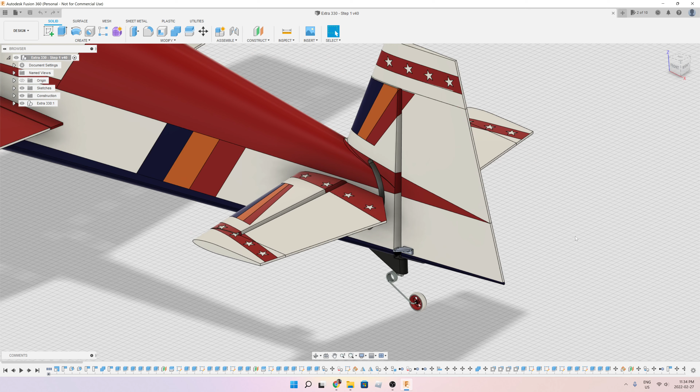I basically finished the wings, the elevator, and the rudder. Let's look at the rudder. So if you look here at the hinge, let me expand this and show you what I've done here.

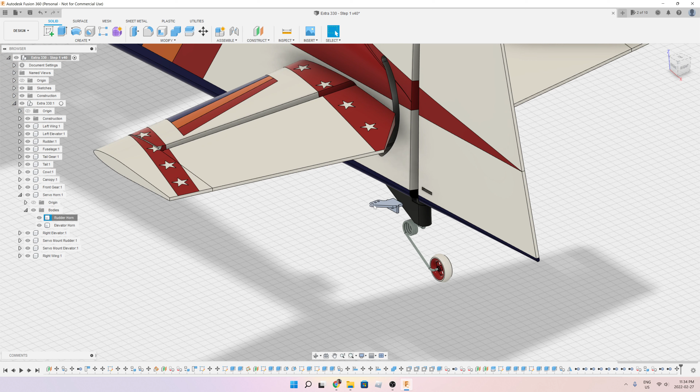I've created holes in the rudder, or a hole in the rudder, so that you can print this hinge separately, then slot it in. And I've tried actually printing this first part of the rudder, and this hole is fully printable and works perfectly this way.

Furthermore, I've split the rudder into two parts to make it easy for you to 3D print it. And let me show you what I mean.

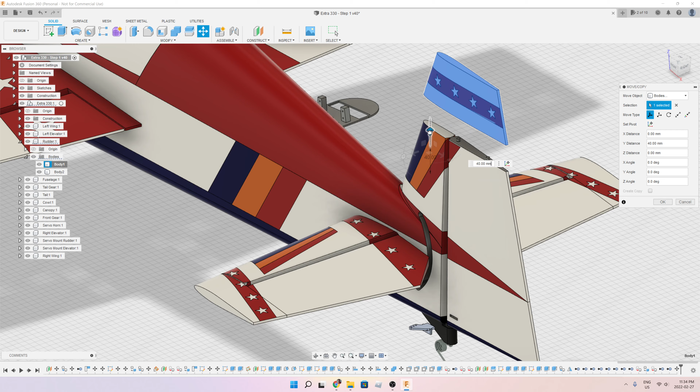I'm gonna expand this. I've split it into two parts. I'll take the first part, I'll move it up, and you can see that I've cut it into two pieces, and I've created alignment tabs. And those tabs will go into alignment holes on the second part, which would make it really easy to print it and glue it together, align it and glue it together.

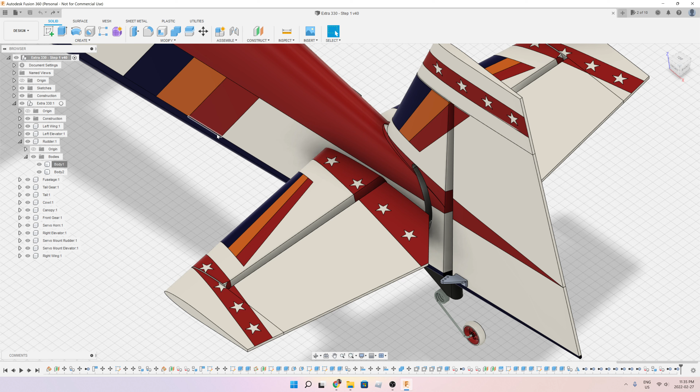The other thing I've done is I've designed small slots for TPU hinges, and those hinges are perfectly 3D printable if you have a TPU filament, which I have. I've actually designed a TPU hinge that I can insert here and glue with CA.

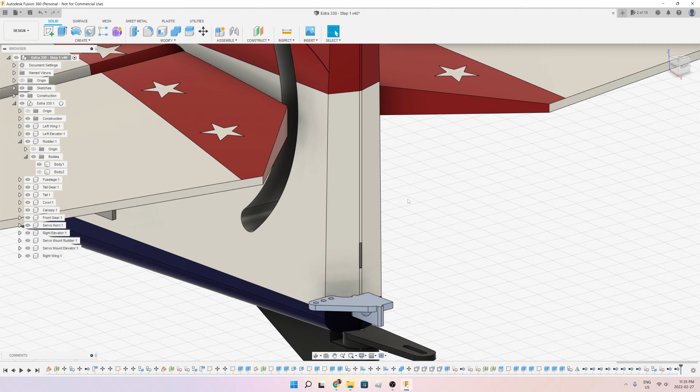So you can see one slot here. This is the second slot, and this is the third slot. And again, I've tried this. I kind of printed like a mock rudder, and I've inserted the TPU hinge in it. I've put some CA glue, and it works perfectly.

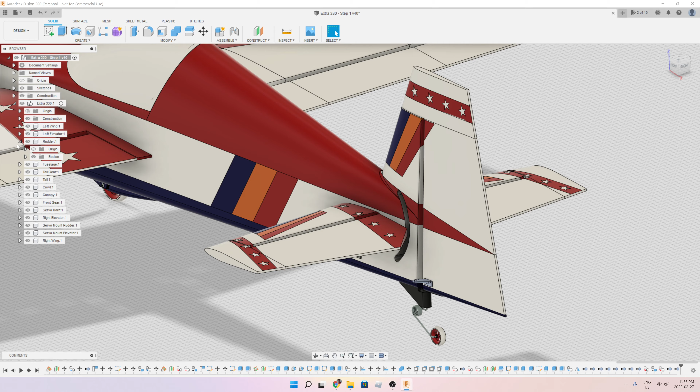Okay, now let's go to the elevator. Same thing for the elevator. I've made a hole for the horn, for the servo horn.

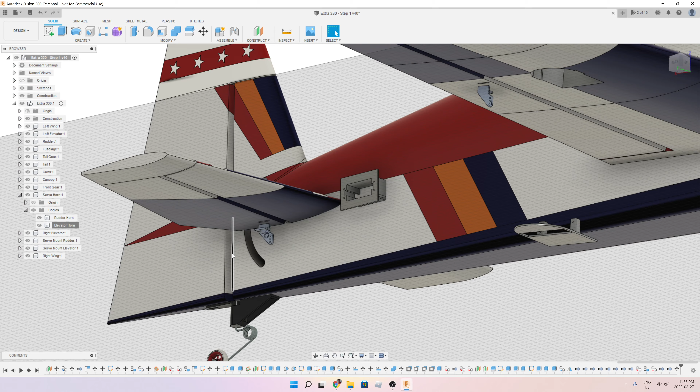Let me take it down and show you. You can see the hole here. Again, fully 3D printable. It's 3D printer friendly.

And I've created this arc here, this hole, which traces an arc in the fuselage, because I'm gonna basically control the elevator using one servo, which is gonna be mounted here. And then I'm gonna connect both elevators with a spar.

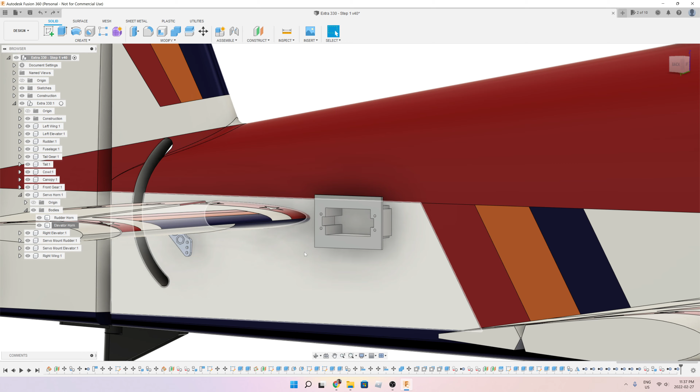And if you look here, you'll see the servo mount. So you just plug in the servo here, and you will have a hole in the fuselage that this servo mount will go into and gets glued, and then this servo would connect via the push rod to the servo arm and will control basically both elevators.

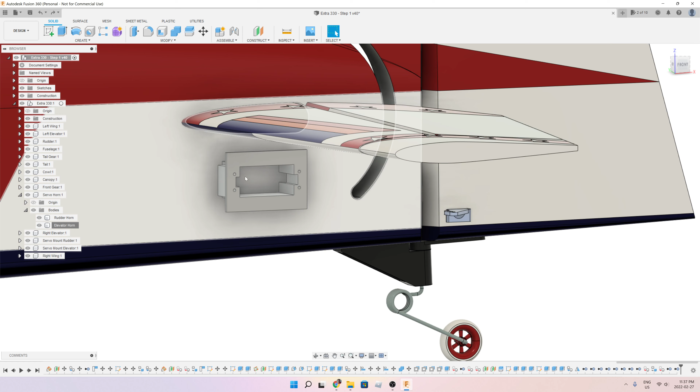Same thing for the rudder. I have basically put a servo mount here, and then you would basically mount the servo. There's a hole in the fuselage here. You're gonna basically push it in, glue it, and then connect the rudder servo with the push rod to this horn.

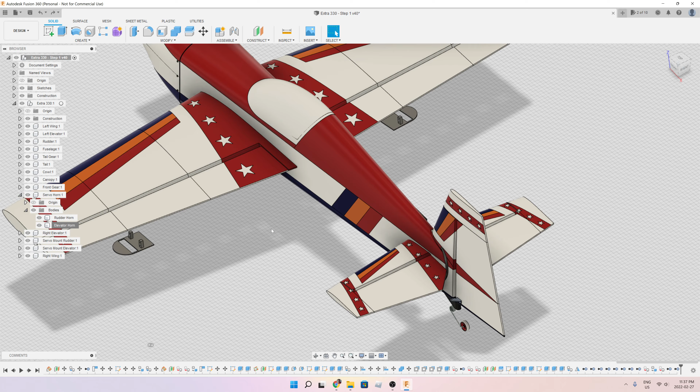I've done the same thing also to the elevator. I've basically cut it into two parts for ease of printing, and same thing here. Let me pull this apart. I've created alignment tabs so that you can basically align it easily when you want to glue it. So you print the elevator in two parts, you put glue here, you align it, and that's it. Really easy.

And same story for the elevator. I've created the slots for the TPU or nylon hinges, 3 of them.

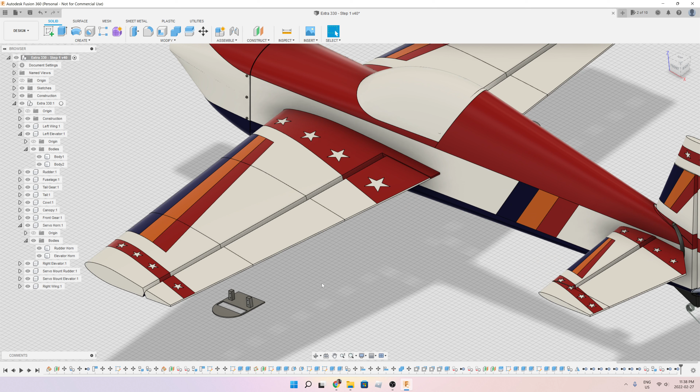Let's go now to the wing, the main wing. As you can see, the wing is quite long, so I've split it into 3 main parts. Even the aileron is split into 3 main parts, same concept as the elevator and the rudder.

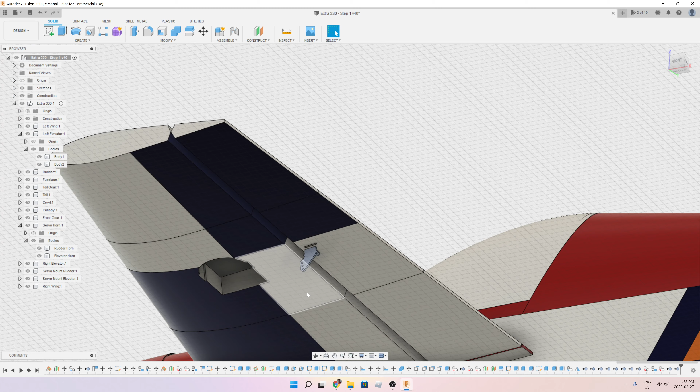I've created slots for the nylon hinges. Same as the rudder and elevator, I've created a hole or slot for the horn to go in, but I've also created a hole for the servo here. You mount the servo on this servo mount, designed specifically for the kind of servos I have, then glue the mount on top of this hole, and you have a working servo for the aileron.

The other wing is just a mirror of this wing, so you can see the servo hole, servo mount, the horn, and the wings. The right wing is also split into 3 main parts. I'll remove one to show you it's the same concept. I'll move this away so you can see it has alignment tabs, same thing with holes on the other side, so that you can glue it very easily.

So that's my progress so far. Now, before going to the next step, this first part was relatively easy - just create slots for the nylon hinges, servo horns, cut the wings up so that they're 3D printer friendly. Now the next part, which is the challenging part, is the fuselage, because my plan is to hollow the fuselage so that I can print it using one wall, one perimeter only.

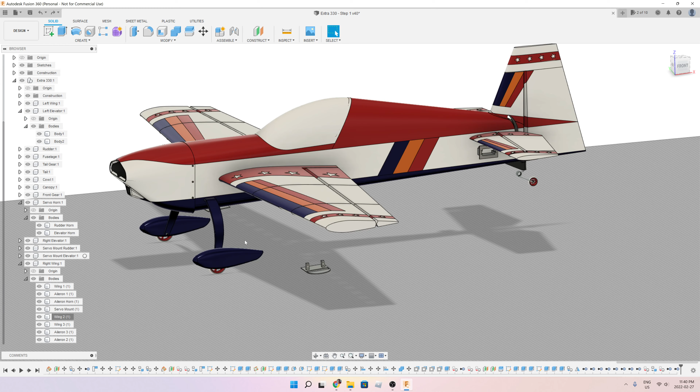However, I need to create a support structure inside the fuselage, because on that structure you need to rest so many things. For example, this gear needs to rest on a really sturdy support structure. Same thing for the wings - I'm gonna create a spar, a hole for the spar, and this spar needs to go through a rigid support structure. Same thing for the electronics and the battery - I need to create some form of tray that rests on some form of rigid support. This support structure needs to extend from the front all the way to the back.

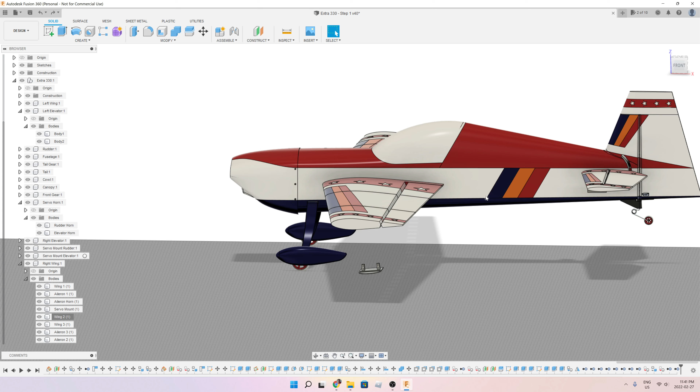So what's gonna happen is I'm gonna cut the fuselage into, let's say, 4 different sections. Each section is primarily going to be printed using one wall only to make it as light as possible. But within this section, you will have ribs to support what I've just discussed, like the battery, the front gear, and other stuff. So that would be my next step.

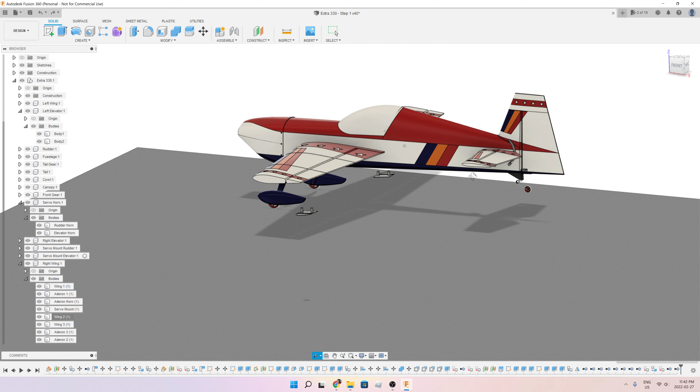After I'm done with the fuselage, I'm going to 3D print the cowl, which is easy - it's going to be printed with only one wall to make it as light as possible. Also, before I forget, I need to 3D print the motor mount, which I have not done yet. So what's still pending is the fuselage, the cowl, and motor mount. This is the update as of today.